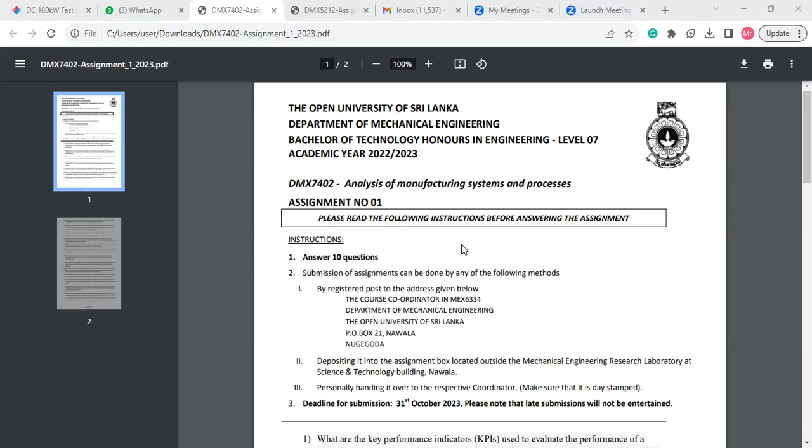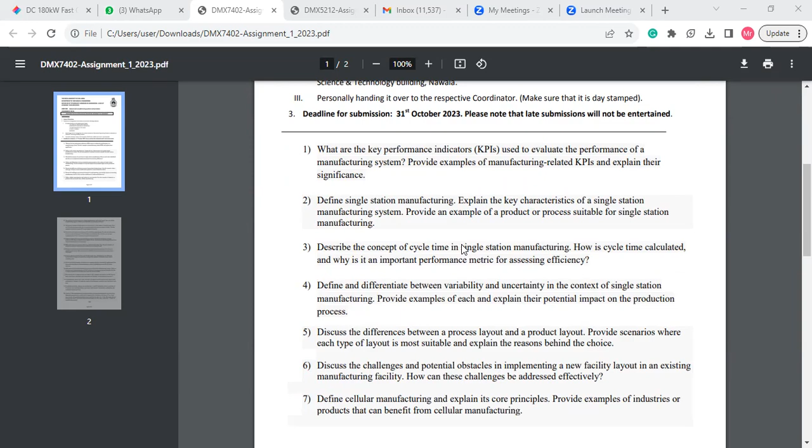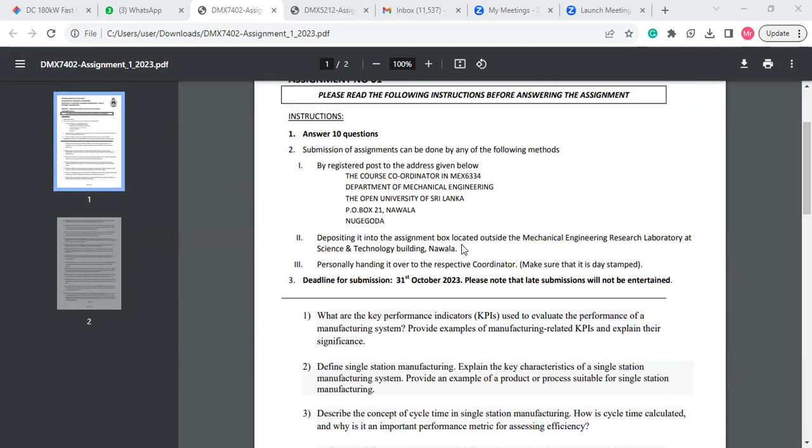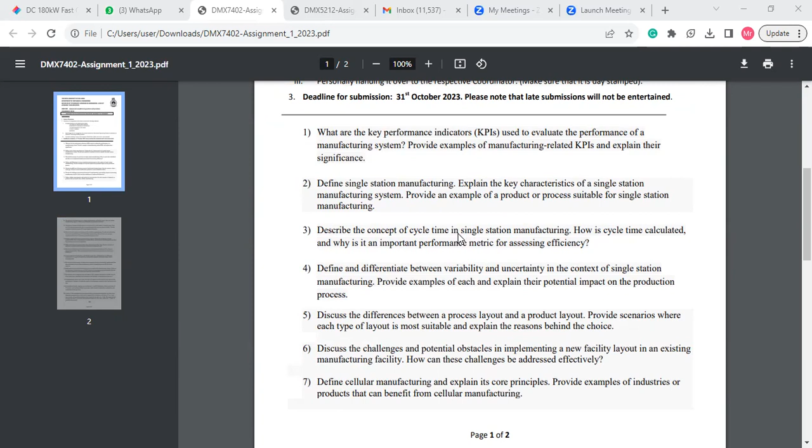Were you able to go through this and answer questions? Did you find any difficulties? Actually, I gave you about 20 questions, but for the assignment, you only have to do about 10. But if you answer all these questions, the CAT will be covered. Did anybody try answering any of these? Do you hear me? Yes, sir. Okay.

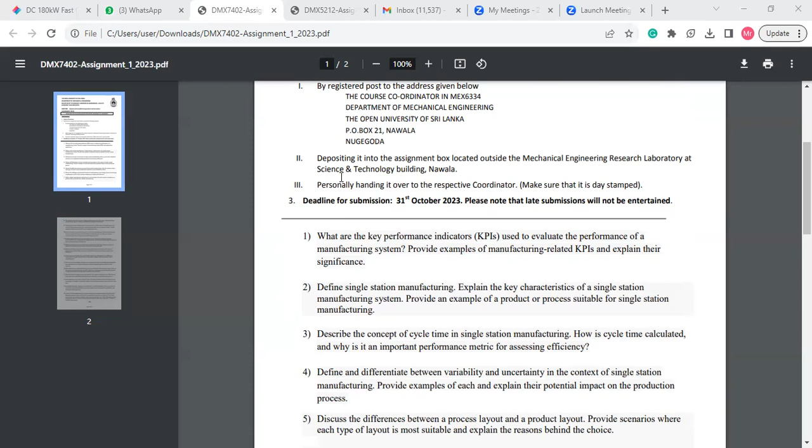Anybody tried to answer these questions? Suppose like the first question: what are the KPIs? That is key performance indicators. You already know mostly what are the important performance measuring indicators in manufacturing analysis, like cycle time, flow time, utilization, work in process, throughput. There are a lot of performance indicators, but you may select a few and answer, though you have to know as many as possible.

So the second question is about single station manufacturing. Actually, I wanted to record this presentation for single station manufacturing last time. When I did that, some students weren't there, but I wasn't able to do it last night. Anyway, it won't be that difficult a question in the CAT paper.

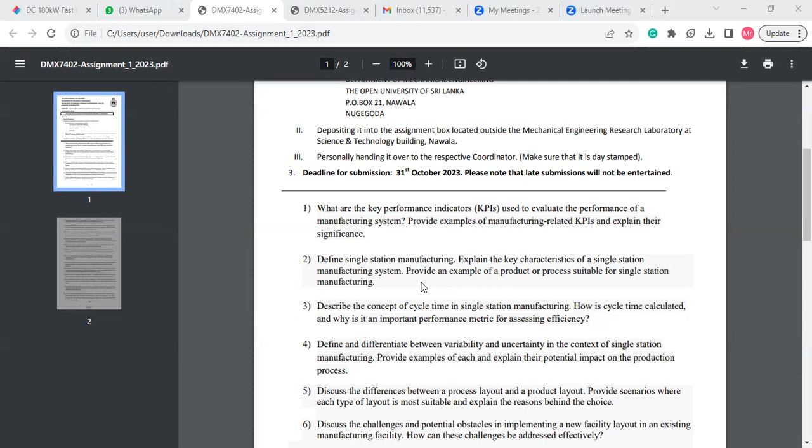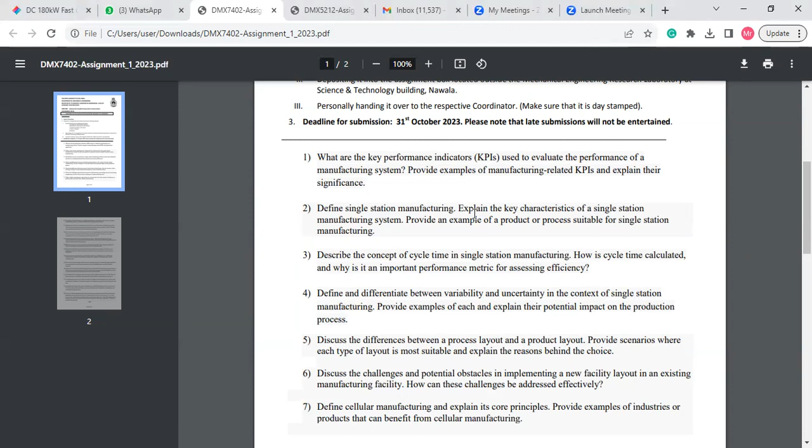Once you're answering, just go through that. And the third question: describe the concept of cycle time in single station manufacturing and how the cycle time is usually... just a minute. Cycle time is usually the time which takes to manufacture or produce a product or a single piece.

So just know the correct definition. Usually cycle time is calculated using the number of parts and the time...

You can say it like this: cycle time equals total operating time of a machine divided by number of parts. So you get parts per hour or parts per minute usually. So usually you can say number of parts per hour that can be produced. So that means one part - the time it takes to produce one part.

Okay. So the next question - I think this was in your very first presentation. Just know these two words: variability and uncertainty.

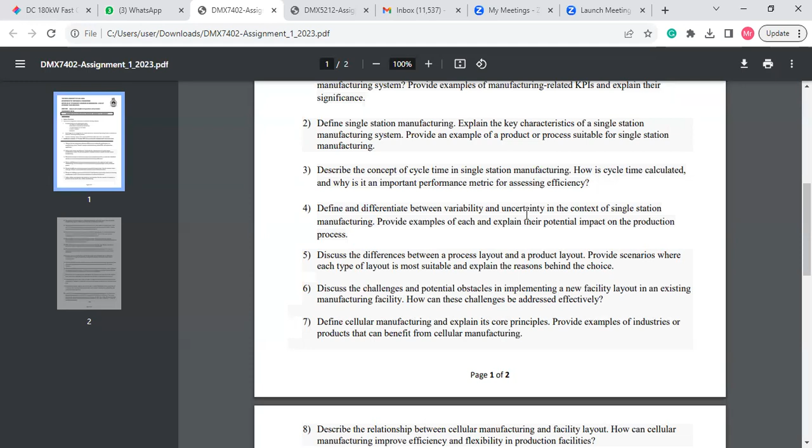As in English, it comes from 'variable'. So the variation or fluctuations which can happen in production lines. Uncertainty is like whatever kind of unexpected situations, like breakdowns - kind of uncertain things that happen. That means you cannot predict, without any prediction, whatever happens in the manufacturing line.

So just understand these two words and write them down.

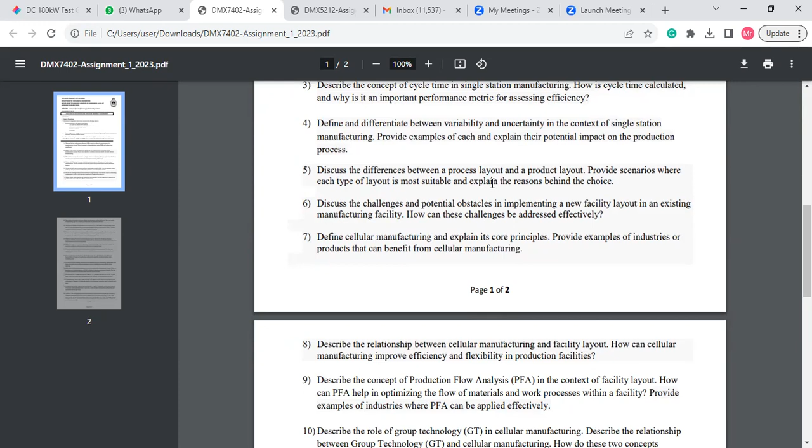You already know I have given you this slide on process layout and product layout. In process layout, machines are organized in a flow from starting raw material to finished product, in an organized sequence from one machine to another. So starting from raw material, maybe forming or forging, then milling, drilling, polishing, quality checking, shipping - it's organized according to process. And in product layout...

It is organized considering the product, like usually in assemblies - for example in an assembly line, which part should come first, which should be second, or which should be the third turning part. Or on a shop floor, for example, maybe first you have to drill a hole, then machine a thread, then the third operation is cutting a slot. So it depends on operation sequence. This is for mass production, usually product layout.

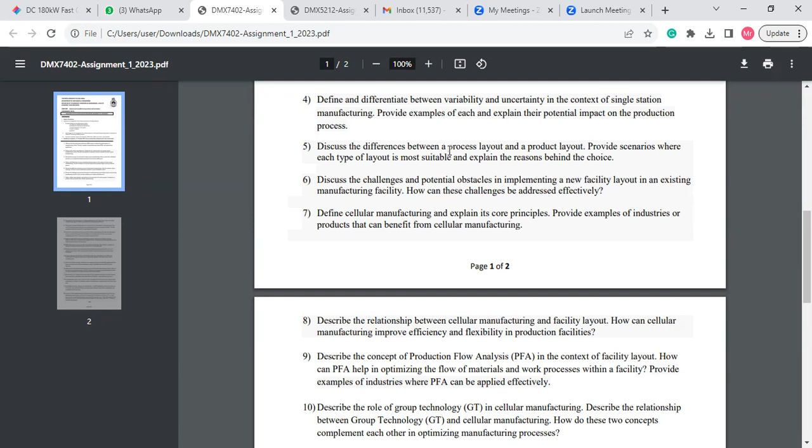So just think of this - what can be the possible obstacles in implementing new facility layouts. For example, if you select process layout, you have to establish the manufacturing process correctly and physically locate all the machines. And if you consider the benefits of selecting a layout, basically it's to reduce the production time, or lead time, or work in process time. Just understand those.

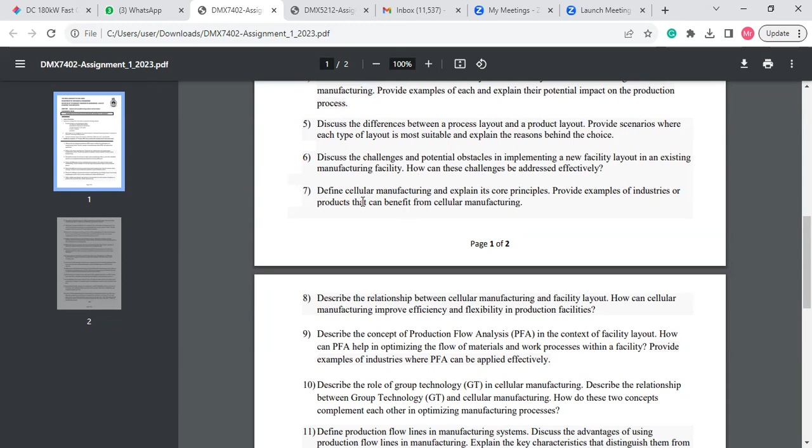And you already know what is cellular manufacturing. It's where production machines - two or three machines - are grouped together to produce a particular component. There can be two, three, or many work cells in a production line. Understand this as well.

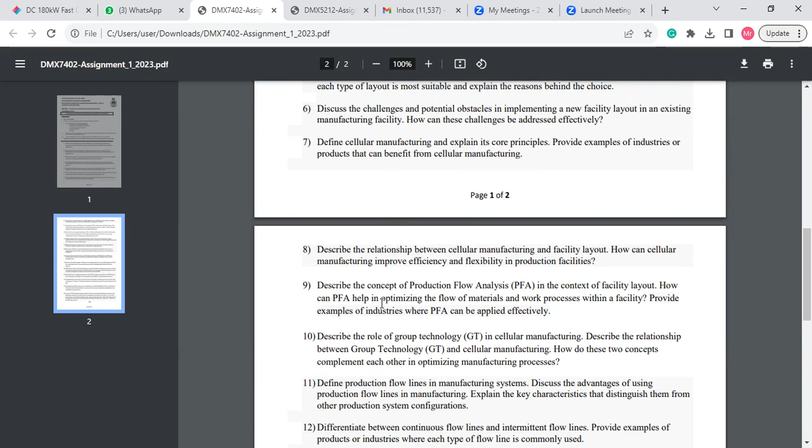You have production flow analysis also. It's a part of group technology. You consider the production process and how you group machines. These are related to cellular manufacturing. When you are grouping production machines, considering the product flow, you make a PFA chart, called production flow analysis chart. You don't have to learn about that, but just remember what production flow analysis is.

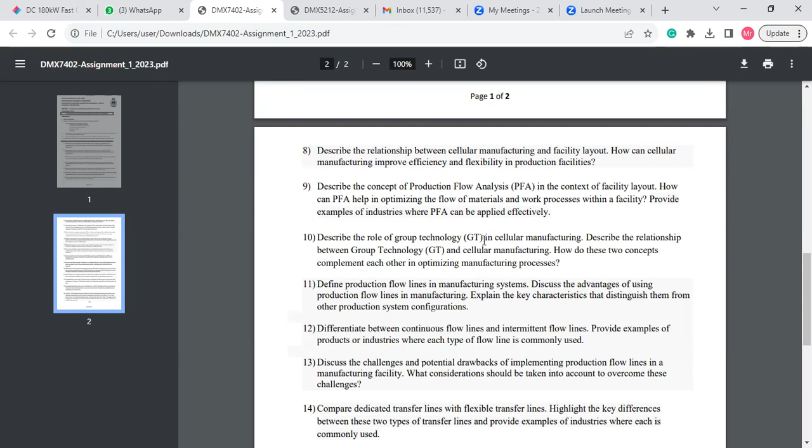So this is what we discussed already. Do you have any questions up to the 10th question which you didn't understand? No questions? So you understand everything I say?

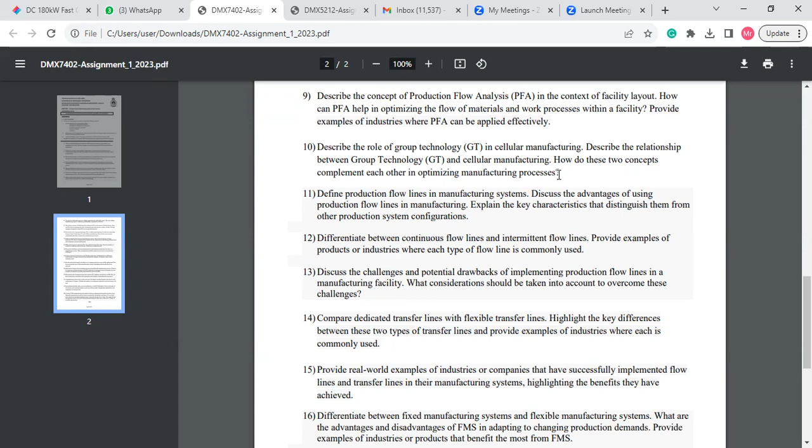Okay, go through the presentation slides and the book as well, I mean the notes you have, and answer up to this, so the 10th question. So if I tell you the most important, hold on.

Can you still see the screen? Because I lost it. Yes sir, yes we can see the assignment. Okay, let me see, I cannot see it at the moment. I'll stop and reshare.

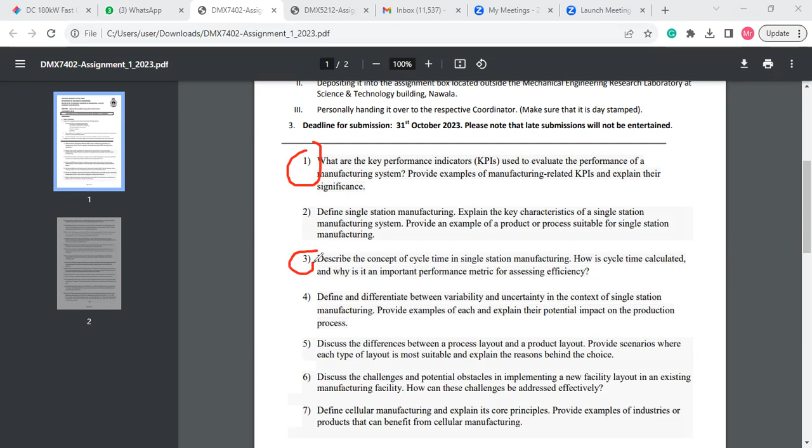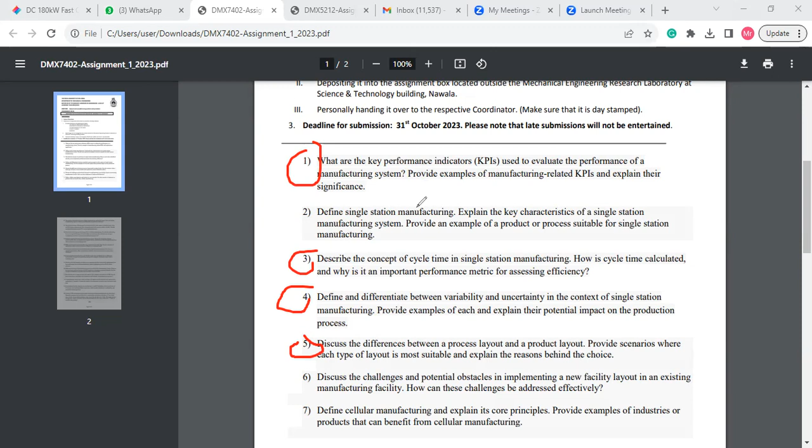Okay, so I just want to tell you the important questions that you have to remember. It's not that you need to mark it on your assignment, I'll just tell you like this. So no, I will mark, let me see it.

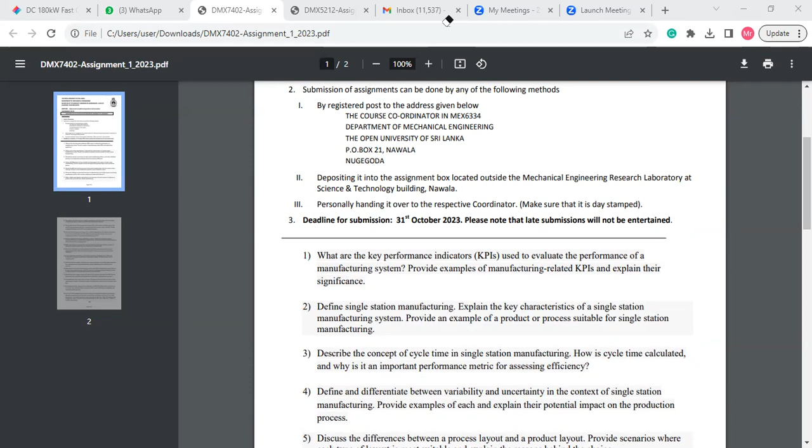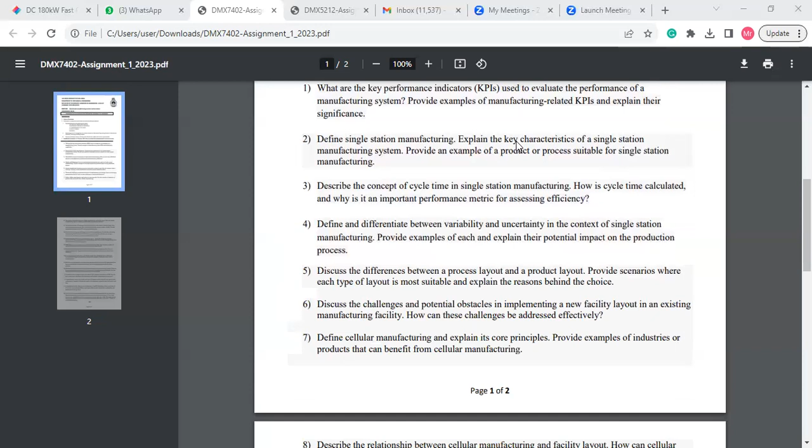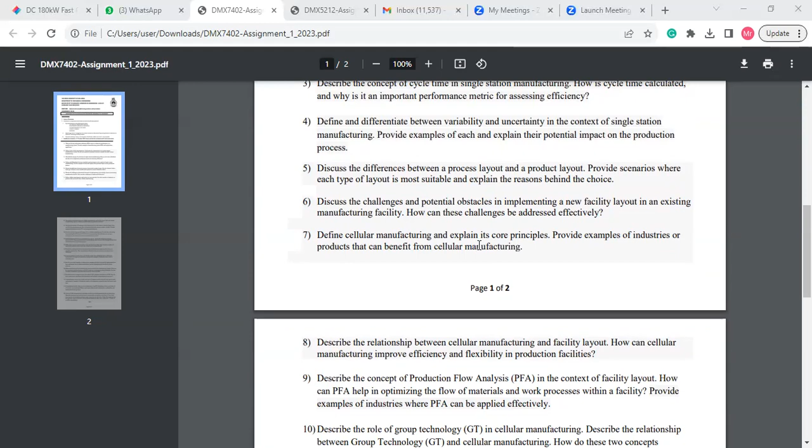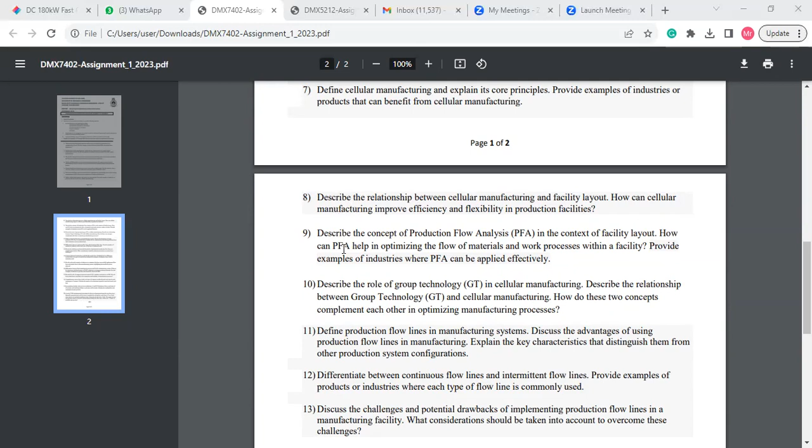So go through question number one, question number three, question number four, question number five, question number seven, question number eight, question number nine, question number ten. So those are the important questions up to ten.

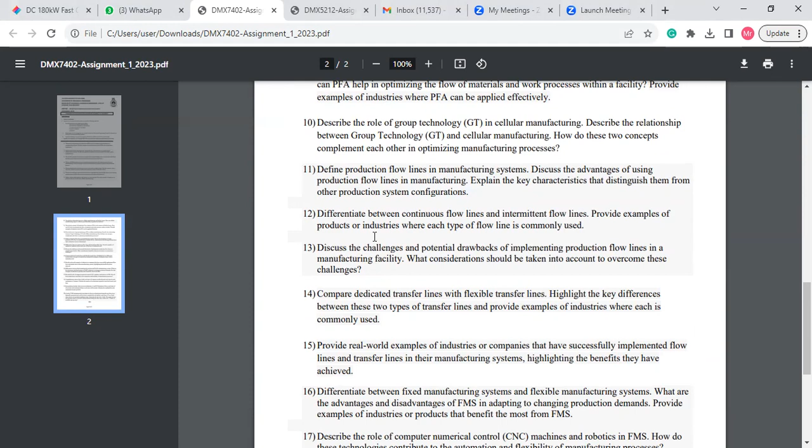So let's see from question 11. It's about flow lines. I have given a presentation slide. I thought of modifying that again and doing a recording on it, but I couldn't do it. But I will tell you what you need up to now, in case it comes up, if you could talk about it. I need to check, I don't remember what is there in the slides.

So you just need to know what a flow line is. A flow line can be called a transfer line. It is usually a sequence of workstations or production machines that operate to finish a product. These flow lines are sometimes called transfer lines - same meaning, like a part can flow through stations, workstations, like work cells. A part can transfer from station to station, from machine to machine, by this type of flow line. So it's called a flow line or transfer line.

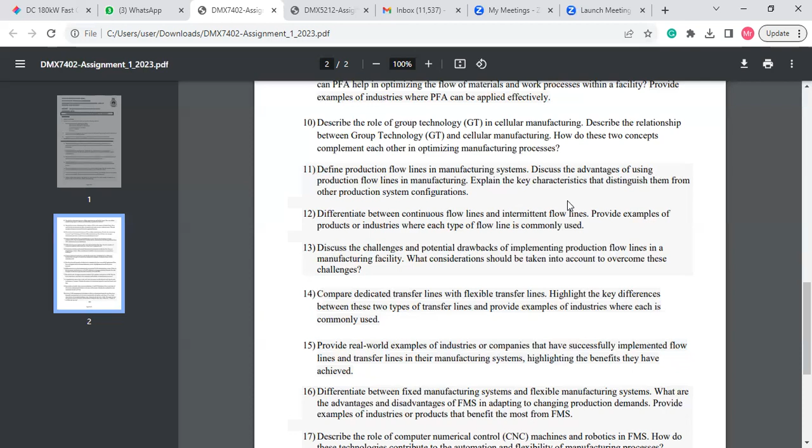In a continuous flow line, usually the product will continue on the line - for example, if you take an automobile assembly line, those are continuous flow lines. In intermittent, as I remember, let me check. The continuous type is for mass production. In intermittent, it is for group or batch production, so the flow pattern can be changed, like the direction of flow or the sequence is changeable. Just find out what types of industries use these.

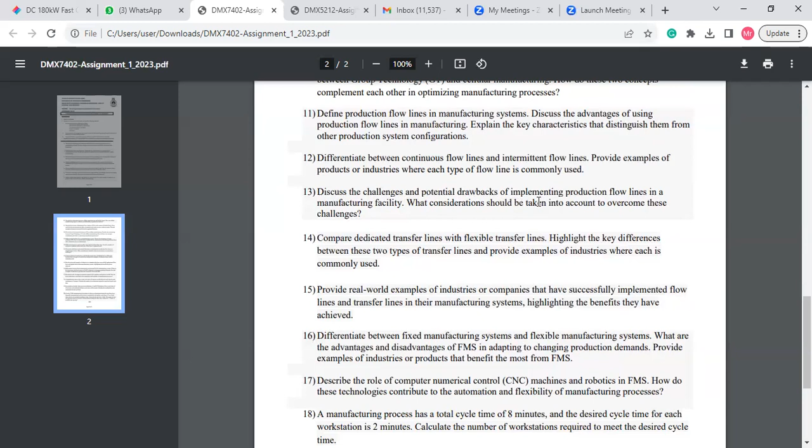So as I said, flow lines are usually suitable for manufacturing facilities with mass production. There are certain drawbacks - understand those, they should also be given in the presentation.

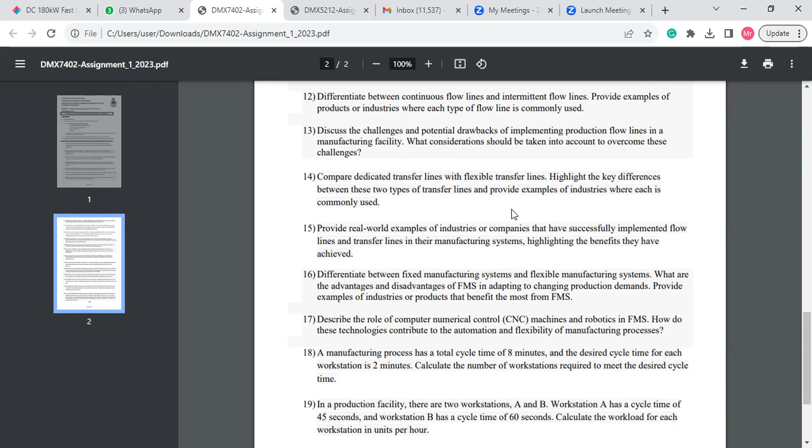And there is another term, dedicated transfer line - it's like the type of transfer line we just talked about, continuous or intermittent. And there is also a flexible transfer line, same as intermittent. In flexible, as it says, it's flexible for change in the flow pattern. For example, you can have two or three machines - a lathe machine, a milling machine, a drilling machine - and a robot arm in between. The robot arm can take a product in any sequence, from machine 1 to machine 2, or machine 3, machine 3 to machine 1, or machine 2 to machine 1, programmed in different ways. So those are flexible transfer lines.

Just read about it, I might be wrong - you may find out more in the presentation.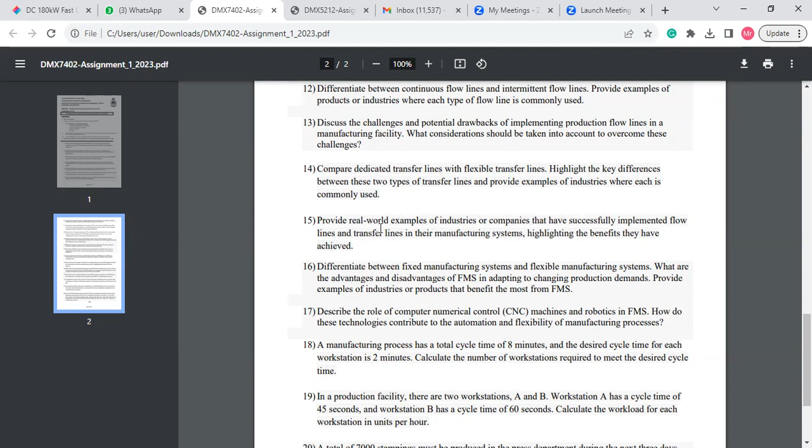So do this by yourself. Just find some examples.

So you have to know what is a flexible manufacturing system and a fixed manufacturing system. As I remember, we did cover flexible manufacturing systems. Did we?

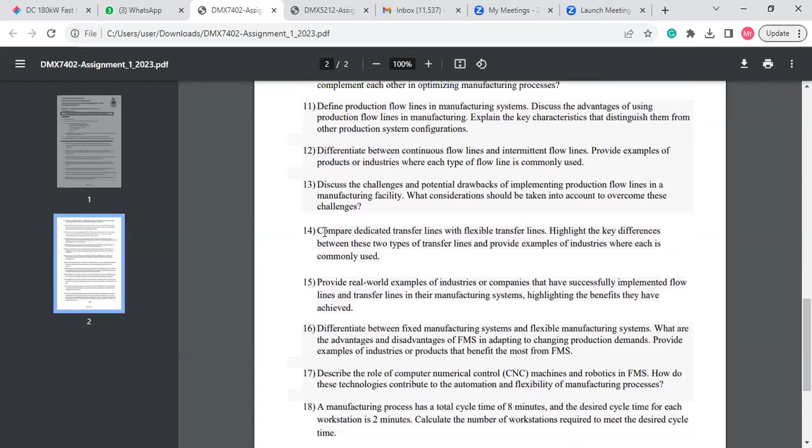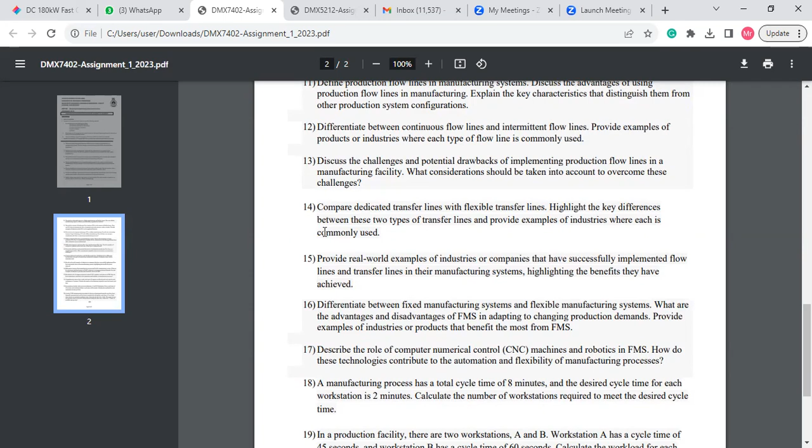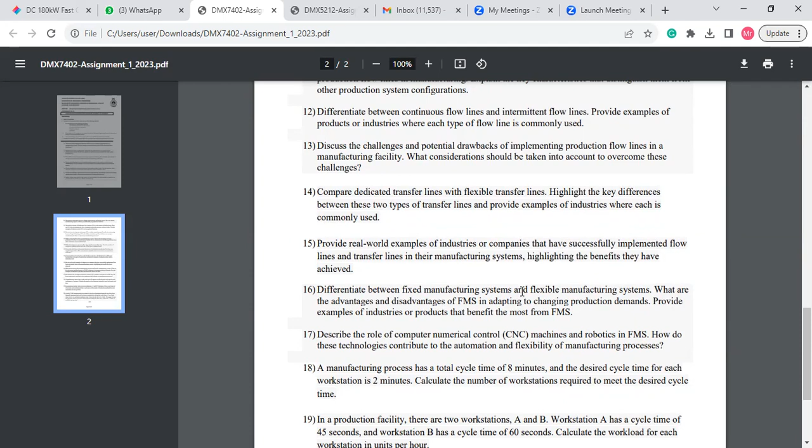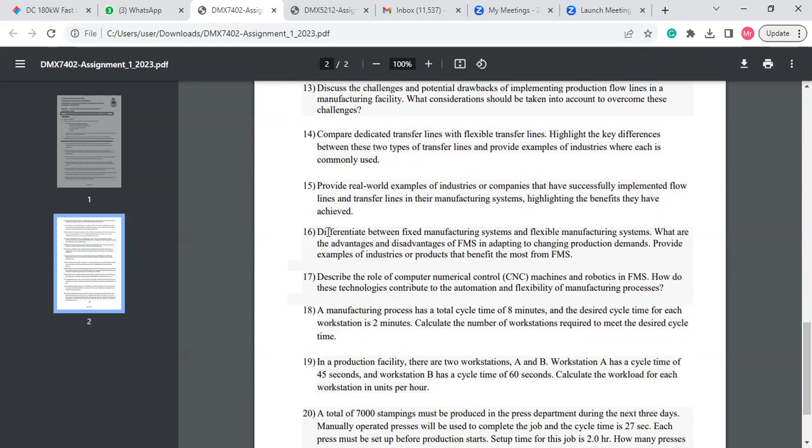So the 11th one is question number 11, question number 12... question number 16... question number 20. So go through those. I will change the slide.

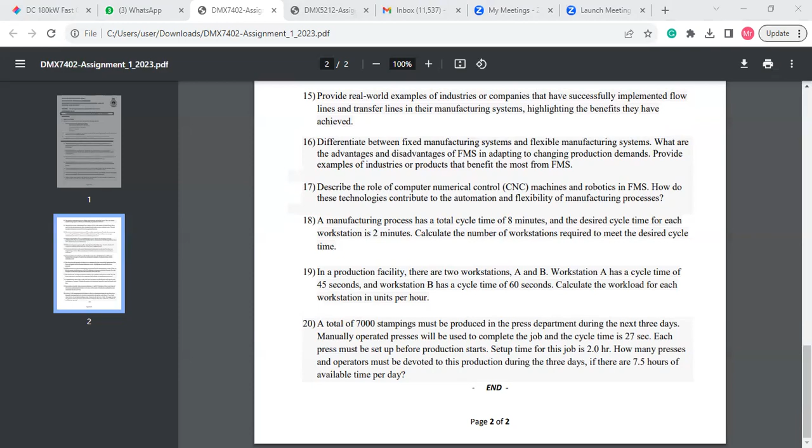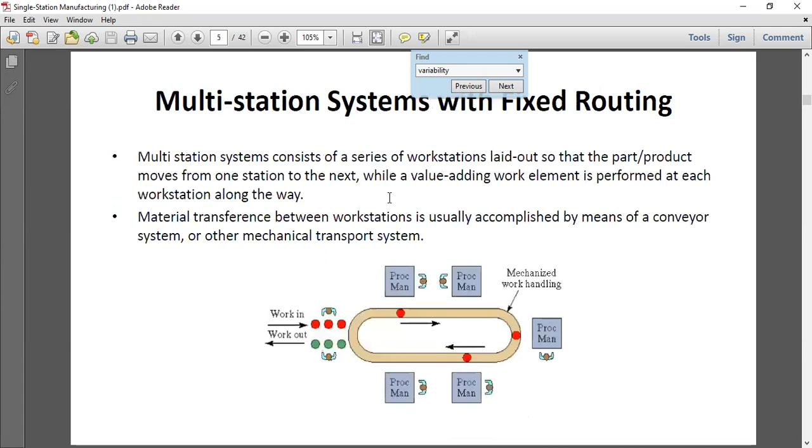I think you can see now the single station manufacturing. Actually, we didn't do the calculation that day. I said we will do it later on, more deeply. But for now, you just need to know something.

And we have to remember these equations. Workload - actually you don't have to remember it, but just know this equation: workload equals quantity of products to be produced in a period multiplied by cycle time, so Q times Tc. So the workload is what we have to achieve in a period of time.

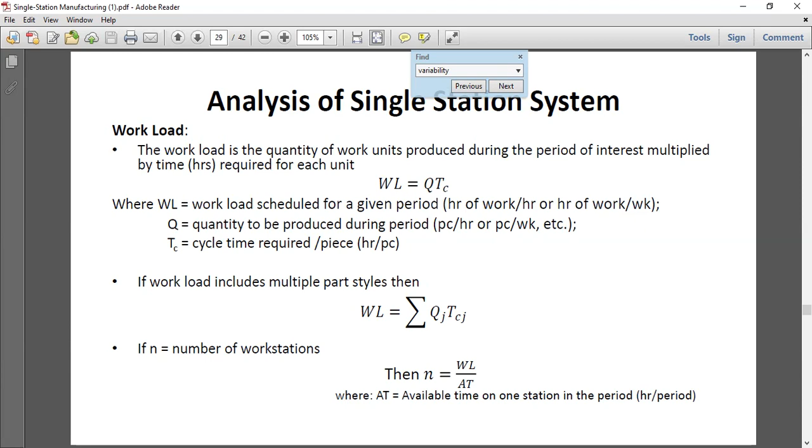That is how long one machine can be used for that work, that is what it means. So you will have this question, example number 1.

It is similar to your assignment, 20th question, the last question. For example, this says a certain facility produces 800 shafts during a week. The shafts are identical, so the same kind of shafts are produced. The cycle time given is 11.5 minutes, and the question is to determine the number of lathes if 40 hours are available on each lathe.

So we have available time of 40 hours. First, what we do is calculate the workload. We have to produce 800 shafts, and the cycle time for a shaft is 11.5 minutes. So we calculate the workload in minutes, which is 9,200. Converting into hours, you get 153 hours.

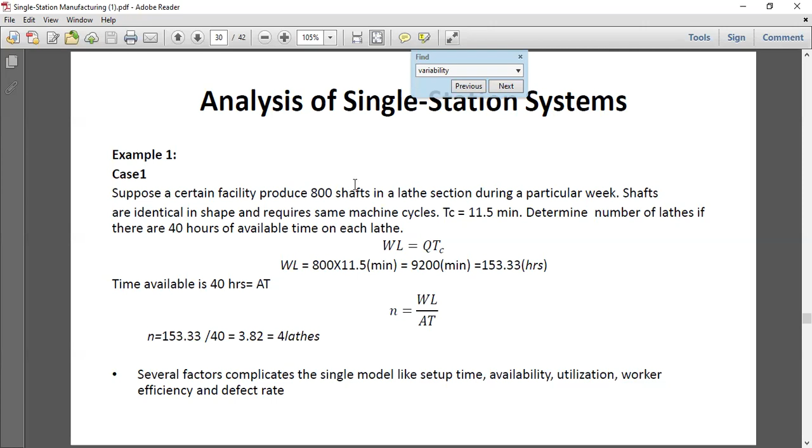To calculate the number of lathes, we now have the workload calculated, 153.33 or so, and we know each machine has only 40 hours, so we divide by 40 and approximate to the closest value. So 3.82 is the equation's answer. But you cannot have 3.82 machines, so you take 4 machines. Practice this kind of question, the last question, the 20th question.

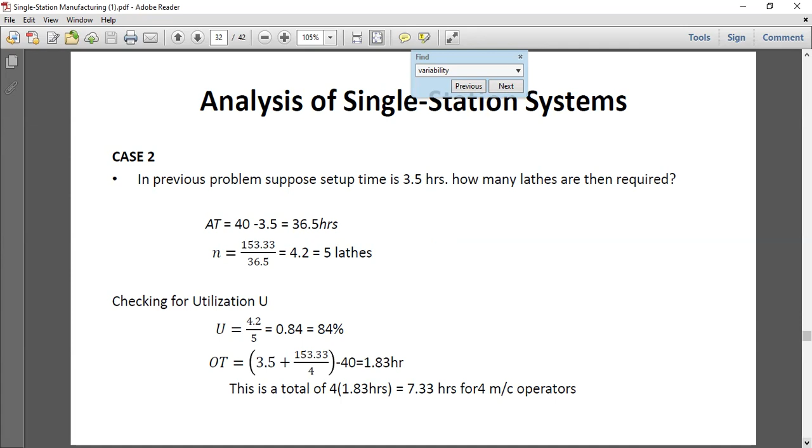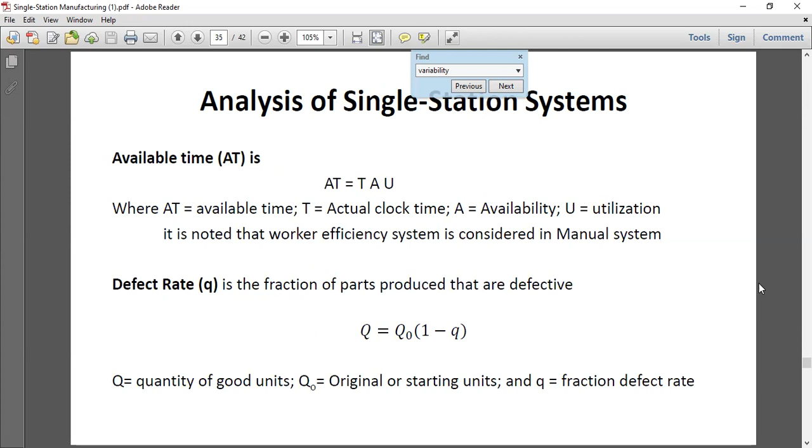These we go through later on again. It's almost the same kind of calculation we will do more specifically when we need to do more work. So that's all for now.